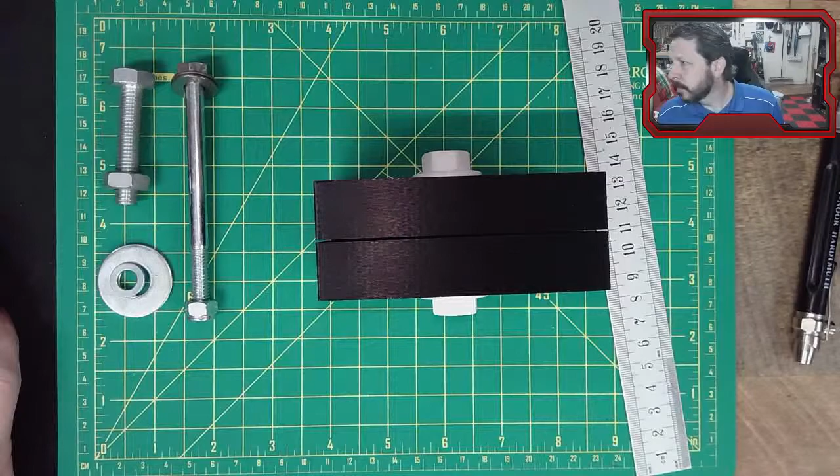Today we're going to move into the actual threaded fastener part of Chapter 8. Last time we did power and lead screws, which are threaded, but they're not necessarily used for fastening things together. They're in the same chapter, Chapter 8 of Shigley, at least the 10th edition. I assume it's pretty common for most editions. But today we're going to look at the beginning of threaded fasteners.

So the point here is that we have something with some threads on it, and we are trying to clamp at least two things together. That's basically the goal here. Now there are a lot of paraphernalia that go with them. There's all kinds of types of them. Let's see if I can pick them all up.

Some of them are named by their head type, what kind of head's on there. Some of them are named by their size. Some of them are named by their thread type. And it's good to have a general idea of all these different things, because some people can name the same thing.

Like this one, for instance. Somebody might call it a cap head screw, because it's got this little cap on it. Some people might call it an Allen head screw because the indentions in here are a Allen. Allens are also called hex keys sometimes, although you wouldn't really call this a hex head because a hex head tends to have a hexagonal shape on the outside of it. Some people might call this a socket head cap screw.

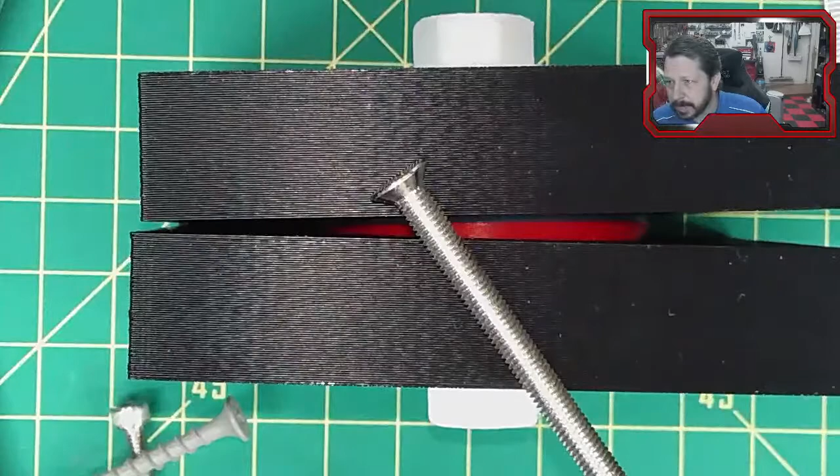Let's see if I've got any other types out here. I have other types of heads, so that's another thing. This one might be what someone might call a flat head because of the head being flat across here compared to something that's rounded. This one's a little bit ambiguous because it has a little bit of a shoulder right here, which some people might make into a pan head, and it's also very rounded, which some people might call round, although I would call this one a pan head. So it's got a little shoulder and a rounded top, and I would call this one rounded.

Oh wait, that's under me. Here, let's put it over here. This one, so rounded and pan head. And then this one being flat. Some people would call this one countersunk because it's got this little taper under it so that when you drill it in, if you've countersunk the hole, it can fit flush with the surface. I don't have an example of a countersunk hole, but it basically matches that shape.

But what I was going to make the point of, this is usually not called flathead because I don't know if I brought a flat one. No, I don't have one that I'm talking about with flat head. But it's slotted. Instead of this, let's see if we can get it to not shine so much. This little cross in here, a lot of times people call that Phillips head. And then one that just has a slot across it is either slotted, or some people might call that a flat head, talking about the kind of screwdriver you're going to use. So one that's got a flat head on it, or one that has this cross like a Phillips, is the other name for that.

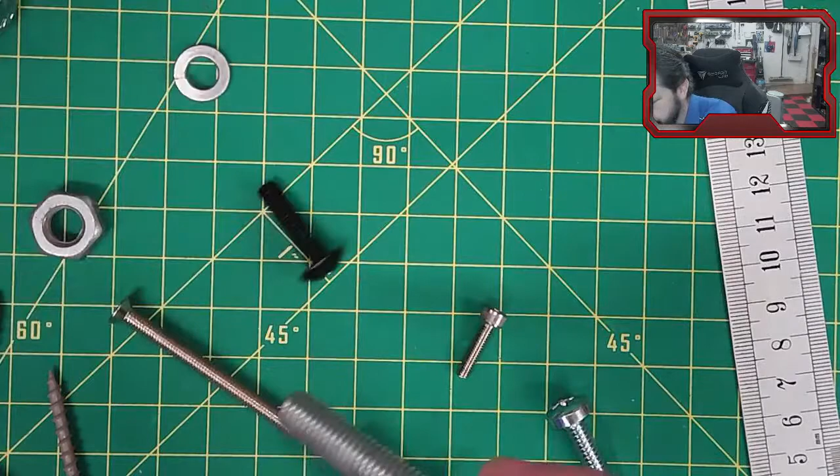So you have screws, machine screws, and bolts. Those are the big categories, and we're mainly going to talk about bolts. So let's look at those. I just want you to know there are all sorts of terminology to be aware of for naming things, naming parts of the bolts and screws. So there's a lot of stuff to make yourself familiar with when you want to talk about fasteners.

Let's get most of these out of the way. We can leave this guy, let's leave that, and let's get rid of all these for now anyway.

So the bolt, and a lot of times you have bolts and washers. I just didn't go find washers that fit this particular bolt right away. Let's screw this on so you can tell which is which.

So you have the head, usually a hex when we're talking about bolts, meaning there are 6 sides to it. There might be an indicator, so this says 4.8. Depending on where this one was made, this one has indicators that are little lines on it. There will be some way, if it was made in the United States, and you're in the United States, it's going to have some kind of indicator of the strength of the material.

We have a chart in your book, 2 charts actually, that describe how to read these. Let's see if I can find one real quick. Might have already passed it up. I'm looking for it. Here it is, or here's one of them.

So you have charts like this. This one had the 3 lines across it and then a manufacturer's mark, I think. So it would match this, which is a SAE grade 5, so kind of middle of the road in strength. The grade 1, actually grade 1, 2, and 4, you can't really tell the difference from the head because they don't have marks on them there.

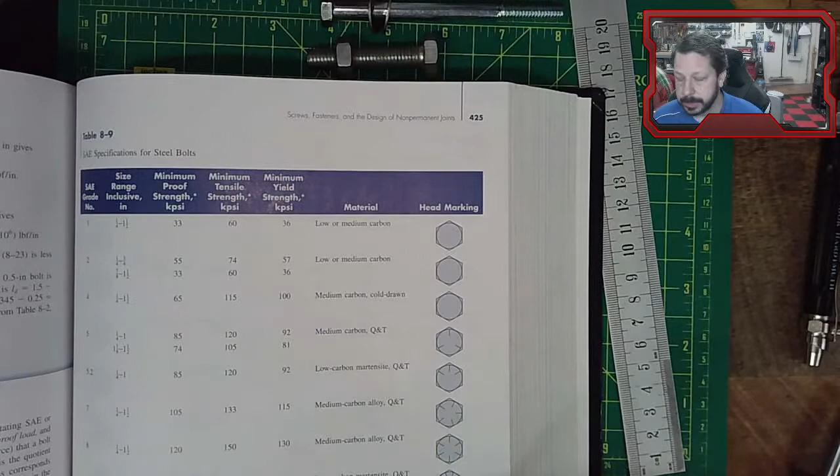But as you get higher grades, you are assuming you've chosen this higher grade because you need higher strength. Look at these minimum tensile. Well, let's look at the proof strength, minimum proof strength. Maybe tensile, because you don't know what proof strength is necessarily yet. So you know what tensile strength is. And look, they get gradually higher as you get more and more marks on these things.

And they get obviously more expensive too. So the grade is probably important in machine design because you're expecting a certain tensile strength, which is related to the proof strength.

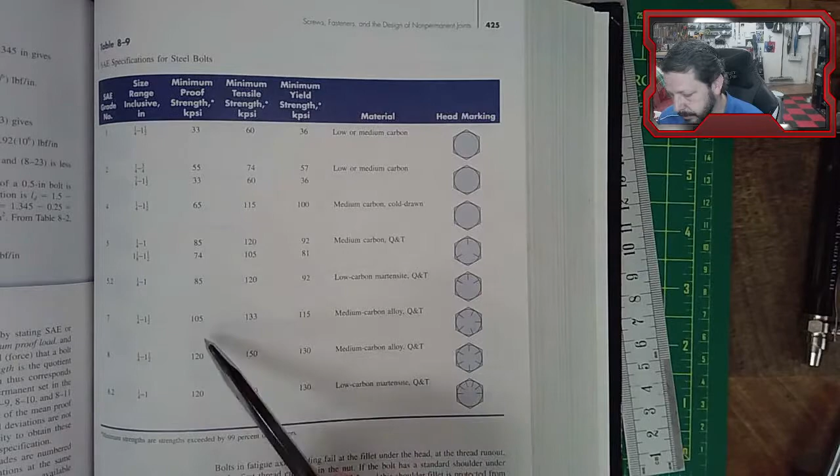The other one I had an actual number on it, 4.8. Let's turn it the right way, 4.8. And that's just a metric mechanical property. So 4.8 is generally used on M1.6, so pretty small, to M16. This is an M10 probably. Yeah, I would say that's an M10.

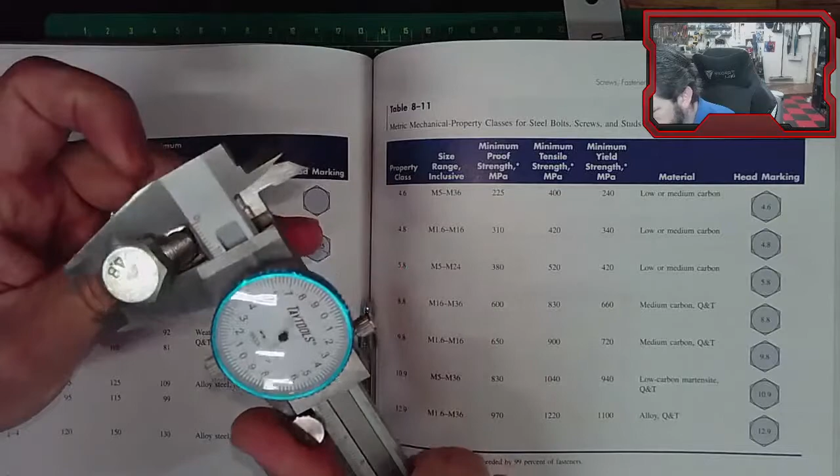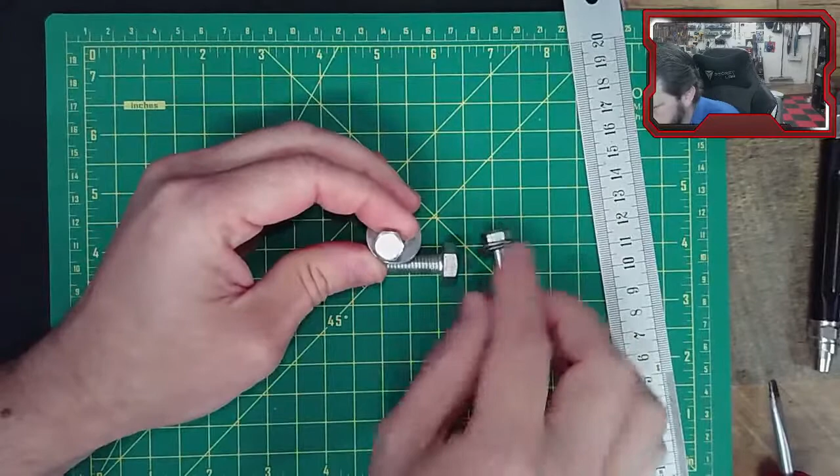Which is in that range, and then it has a certain set of strength characteristics. Same thing with it, that as the grade numbers get larger, the strength gets higher. And then there's other sets over here, ASTM type of sets, that you can tell. Again, not every bolt is going to have a mark on it. Here's one that doesn't have a mark on it, so either this one wasn't made in the United States for sale in the United States, or it's one of the really, really weak ones.

So you don't really necessarily know when they're not marked. In that kind of situation, you're either saying that bolt is not going to be carrying that much force, or it's not that important, or whatever. We just need something to hold these parts together. Whereas the ones that have certain marks on them, you're aiming for, you need at least that much strength. So you can always use a stronger bolt if you end up needing to, but you wouldn't want a weaker bolt. So you have these marks on them.

We have these thread profiles, like we talked about a little bit, and I didn't talk too much about them, but there are, in your book at least, we're going to go with 2 basic thread profiles, the UNC and UNF. So UNC is unified coarse, UNF is unified fine, and both of those are going to be listed out with some details about them which we'll need, not today, well actually maybe today.

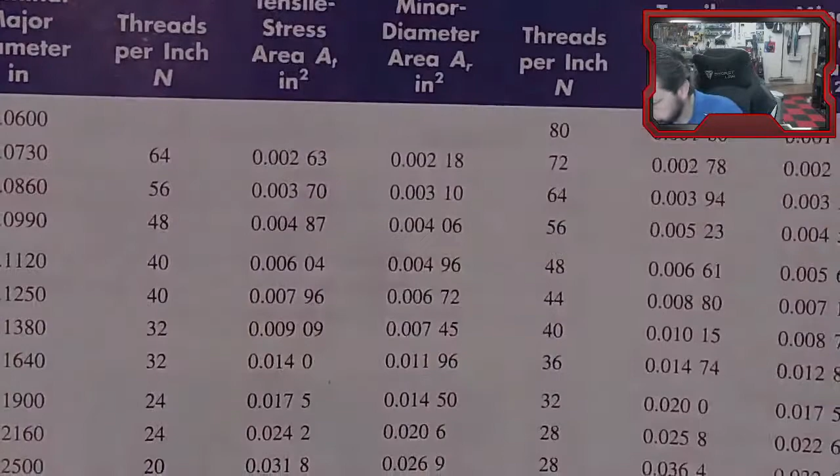They're going to be listed out in this chart, table 8.2, which we're really zoomed in on. And table 8.2 is just for US measured ones, so this isn't a metric table. There is a metric table on the previous page, table 8.1 though, that has some information also, and it just doesn't on the other table.

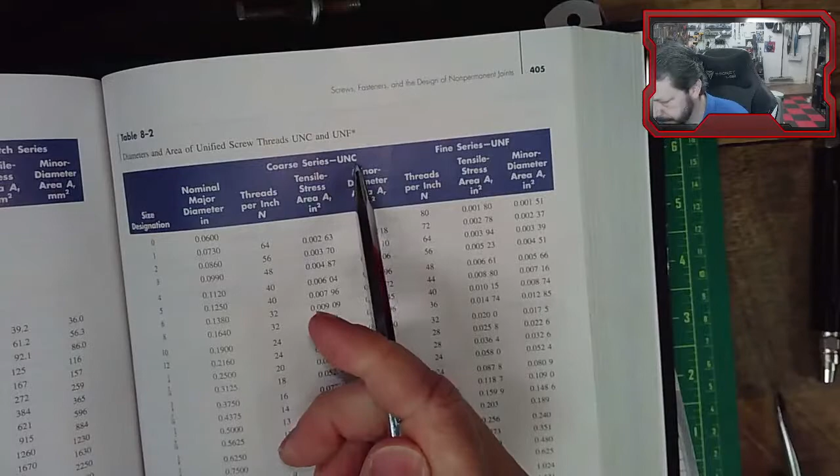It just says coarse and fine. This table says UNC for unified coarse, UNF for unified fine, and again that coarse and fine is threads per inch. How many threads are there per inch? Obviously, in the metric, you don't measure threads per inch.

So you've got information here about these diameters, the tensile stress area. This tensile stress area is when the bolt breaks in the thread somewhere, which isn't necessarily one of the more common places it's going to break. But if it breaks here, that would be that area in tension. It's similar to the root diameter, the area at the root diameter, but it's actually determined through testing.

So we need that just to figure out what area is carrying this tension. Bolts are going to be in tension when, we've got two pieces that we want to bolt together, and as you turn the nut - normally you turn the nut, not the bolt head - you're stretching out that bolt to a certain point. Depending on the type of connection you're trying to make, that determines how much you turn this nut.

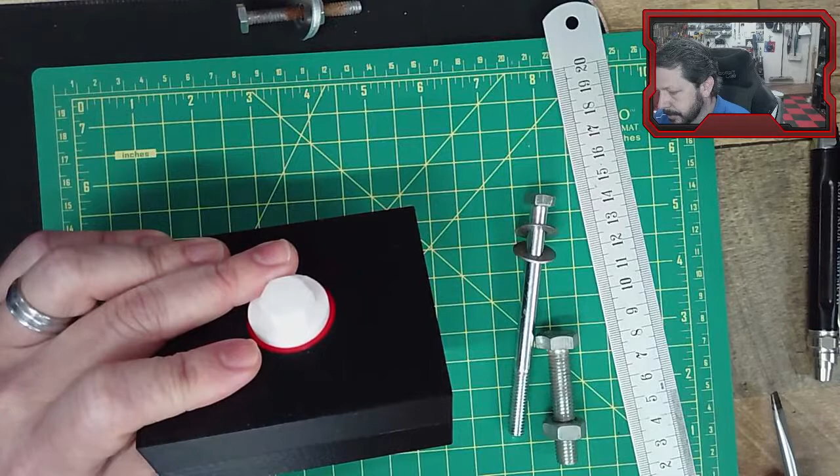The second most accurate way - well, there are some other in-between ways, like bolts that have little indicators in the head that change color when they've reached a certain tension. Those aren't very common, but maybe you can't get to both sides to measure, and you can only see the head, so there are some indicators like that. We're not really going to talk about those beyond what I just said.

The second most accurate way is you tighten the nut down until it is snug, and then you turn the nut a certain number of revolutions. You might see it as half turn past snug, or quarter turn past snug, or however many revolutions or parts of revolutions you need to induce that clamping stress, called preload, in the bolt. That's the second best way to do it.

The third best way is actually using a torque wrench. Torque wrenches can notoriously be cheated - you can jerk on them and they'll click, or the indicator will reach the number you're aiming for, and you didn't actually apply that kind of torque. They're also subject to this: you're not only measuring the torque applied to stretch the bolt, but torque being used up in friction in the washer or beneath the nut. A lot of times you don't necessarily have washers beneath nuts, I just put one here. So there's friction included, even if you're carefully turning it.

So torque wrenches are probably the third option, and the last option is just tighten it until you can't tighten it anymore. It might sound like the torque wrench is the best one because you have an indicator showing how much torque you're applying, but in very precise situations that's actually not the best option if the others are available - you can't always measure the change in length. The turn of the nut is usually a pretty good one, because no matter how much friction is involved, you're still turning the nut a certain amount, and that amount combined with your knowledge of the pitch of the screw tells you how much you've stretched the bolt out. So it's very deterministic that way - there's not a lot else going on. There are tiny things we'll talk about, but not that much.

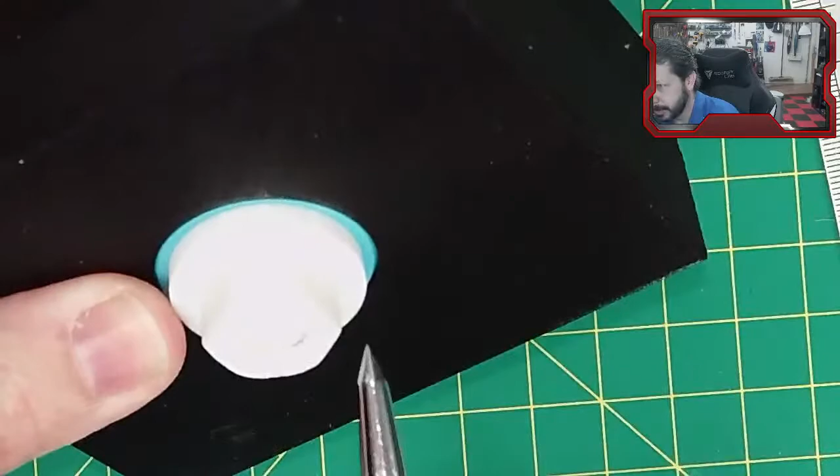Now this one, I've got some much larger washers on it, so some oversized washers. It's kind of blowing out with the camera. That's a little better, I guess. So this is an oversized washer just for something we're going to do later. But there's a little fillet underneath here. Let's go back in. Little fillet - you can kind of see a little fillet in there a little bit.

And so that fillet is one of the more common failure points. Because it is a fillet, there is a transition. And if you don't have a washer, that makes it worse, because the fillet can get caught on the edge of the hole. If you turn the washer upside down, now you've got this sharp edge of the washer on the fillet here, so that's even worse. So you really do want the washers in their correct orientation.

Another common failure point would be wherever the threads start. Now on this bolt, the threads start or end, whichever way you want to think about it. It was threaded from this end forward, so this might be the thread end, I guess is what you actually would think of. That coincides with the fillet, so that's a double whammy on this one. This one, since it has an unthreaded region, has threads that end right in here. You can probably see the lead out right there.

And so this is a common point of failure. This is a common point of failure. And then whenever you finish clamping, that first nut or the first thread in the nut is also a common point of failure. We talked about last time with the lead screws how there was 38% of the load carried in the first thread, 25% in the next thread. I don't remember what the third thread is, but it was smaller.

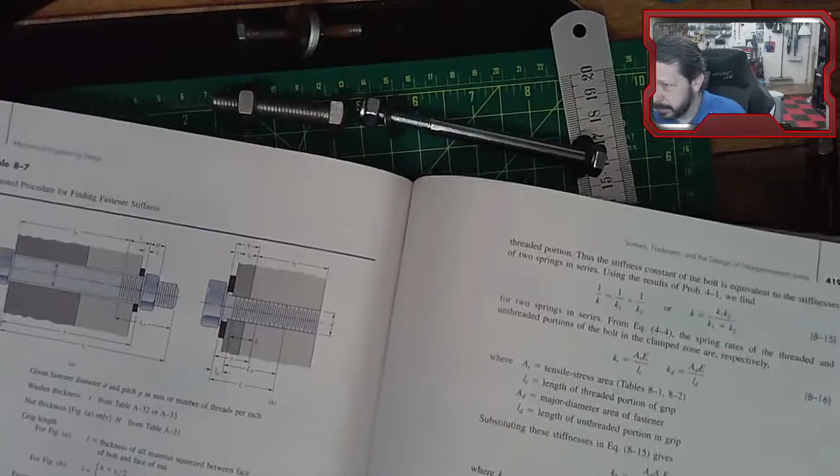You have a page that's really useful in your book, once I find it. Oh, like I was talking about the different head shapes and everything, your book does go through and describe them and give you some others over here, but that's not what I'm looking for right now. I'm looking for this page, so we might have to zoom out. We are zoomed out, it's just a lot of stuff on this page, 418, or table 8-7. I assume in most editions of the book the table number is probably the same, the page number might be slightly different.

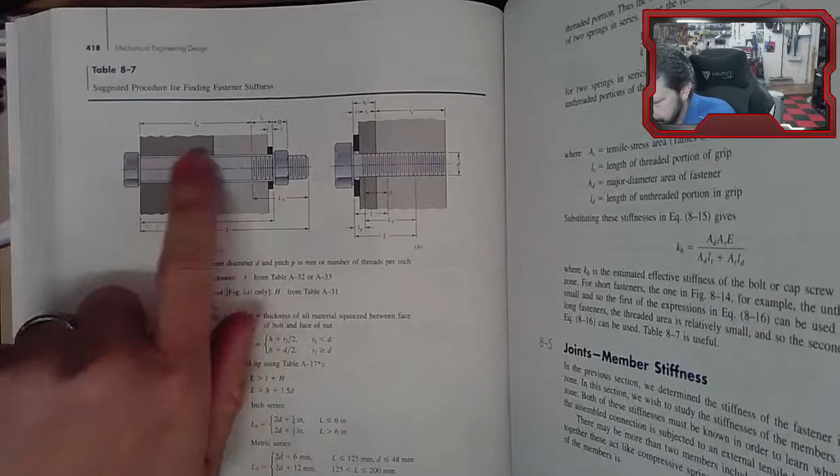What this page does is give you two scenarios for fastening at least two pieces together. It can be more than two things bolted together, you can have 3 or 4 things, but in general there's 2 things bolted together. It shows one situation where you have a bolt and nut, and the bolt goes all the way through, you screw the nut on the other end. This one actually has a washer on the nut side, and they're just using the washer face of the bolt on this side. This one is hard to read.

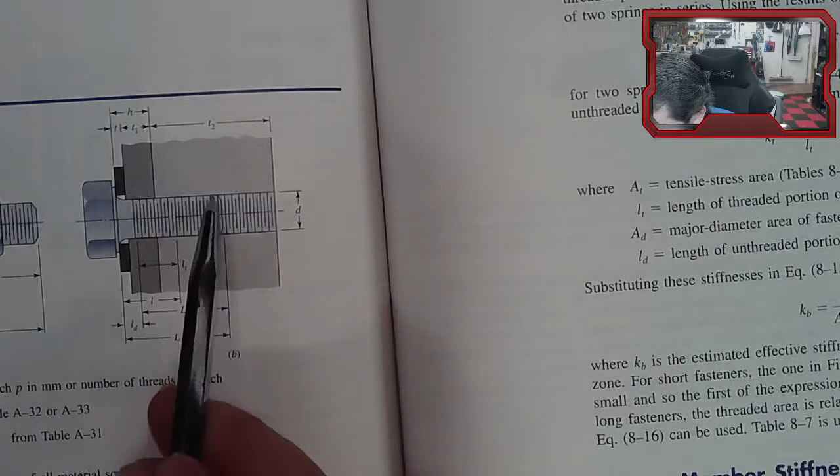You have to look at it really closely. Let's see if I can find my pointer. Maybe we can even zoom in, because it is, there we go, we can see now. This little piece right here, see how it doesn't look like all the others? Those little angles are showing the end of the bolt. I really wish they'd have colored this section different or something. Maybe I could even do that on mine.

This part is not the bolt, this is the hole. The hole goes in the dark gray, there's just a hole. In the light gray there is a threaded hole here, and the bolt goes through the dark gray. You don't want the threads in the part that's being clamped to the other part, because it needs to freely slide through this part, and it screws into this part. This one, you may or may not have access to the other side. This one looks like a through hole, but it could be a dead end, not a through hole. If possible, you want a through hole so stuff doesn't get packed down in there, but you don't always get that option.

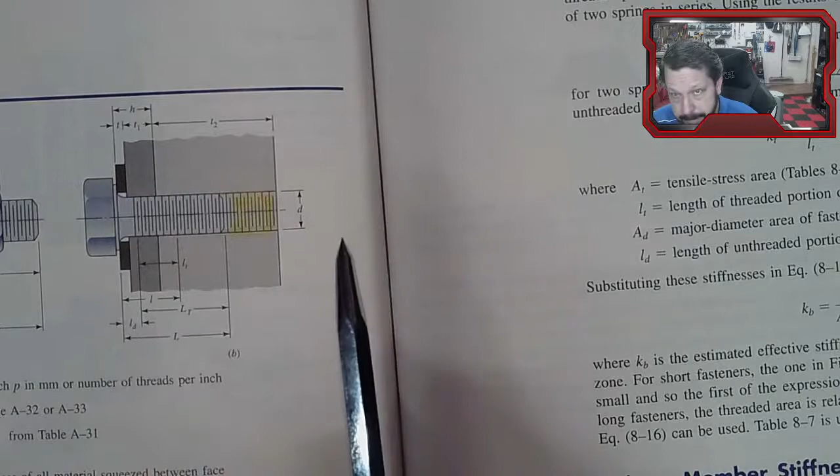So this one would be the case where the bolt doesn't have a nut. All the threads are in the bolting or clamped piece, one of the clamped pieces, the one on the other side of the bolt head. This one is just being squeezed to that one, so there's no threads in this one. It does have a washer here.

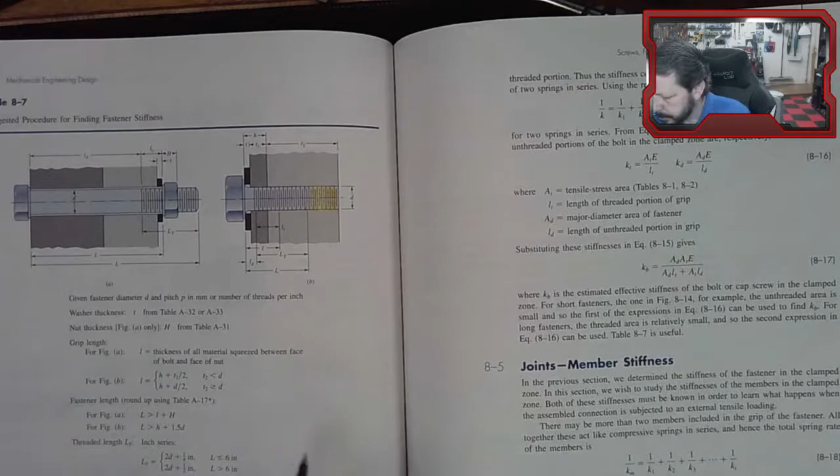All these little L's, LT, D, all these things are actually described further down this page. There's a lot of definitions down here, some on the next page, but these are all the lengths you might need when we're calculating what we're going to calculate. So today we're going to calculate stiffness of the bolt itself, the fastener, and stiffness of the pieces being bolted together.

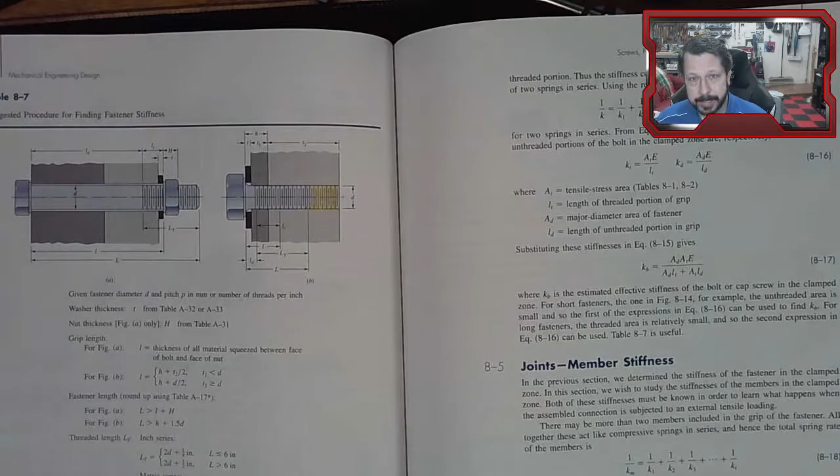And the combination of all of that. So what ends up happening, and it might be easier to think of with this one, is the more you tighten this nut, the more you stretch this. I'm stretching a piece of metal. It's a spring at that point, just a really stiff spring, because it's basically this solid piece here. This one, if I'm tightening this, I'm stretching this portion and this portion, which does not have threads. This one does have threads, so they have slightly different spring rates.

So I have to add those together. This one is just all threaded, so I wouldn't really have to do anything different with it. It's just one spring rate in there, unless you really want to get picky and say there's a tiny little section up here that's not threaded. I don't know that you want to be that picky though. Make it a little brighter.

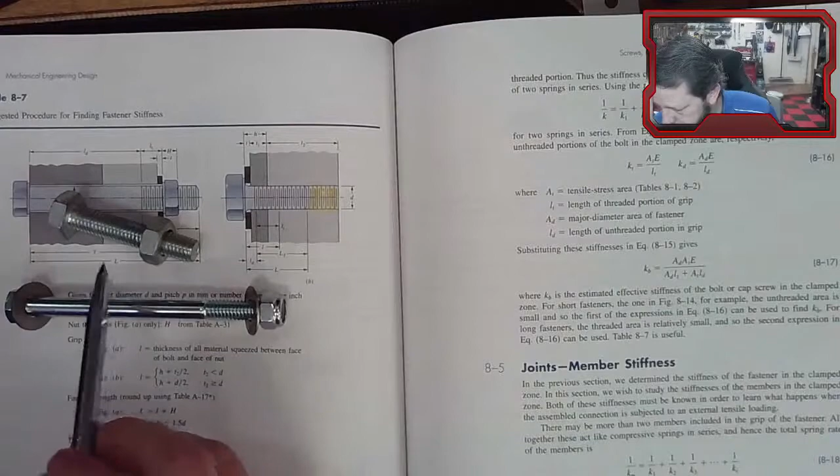All right, so this spring here, as we pull on it, it's not a very efficient spring I guess, but you do apply a tensile force and stretch this out so that it does have a spring rate. It's just, again, millions of pounds per inch spring rate. And at the same time, you're compressing the things you're clamping together.

Now this one, I want to show you why I've made this here, and actually this one we might need to make even brighter. So remember, we're stretching the bolt. It's a spring. We're compressing these clamped members, and they are also really stiff springs, even stiffer than the bolt is. But we're compressing them.

But the bolt only has so much influence. It can't, if I'm clamping here, then I'm not really compressing something that's over here, or even on the edge here. I'm not really compressing this part too much, other than the fact that I'm pulling the whole piece of metal together. So there's these zones of compression that really determine the spring rate, and that's what is inside here.

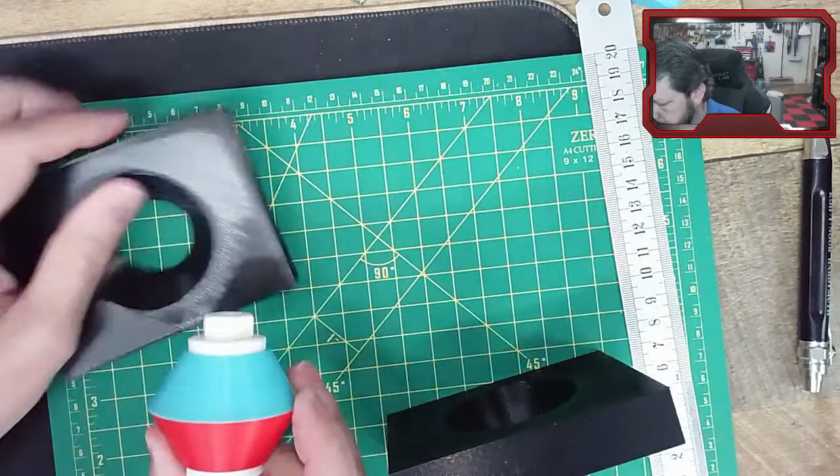So this shape here, this is two shapes actually, let's take it apart. Kind of screwed it together pretty tight. Oh, here's the nut over here.

So these shapes are called frustums, sort of like a cone with a hole through the middle, and we've chopped off the top. I have two of them that are, in this case, identical. They're often going to be identical, but it's not always quite as simple as that, because these could be different materials, they could be different thicknesses.

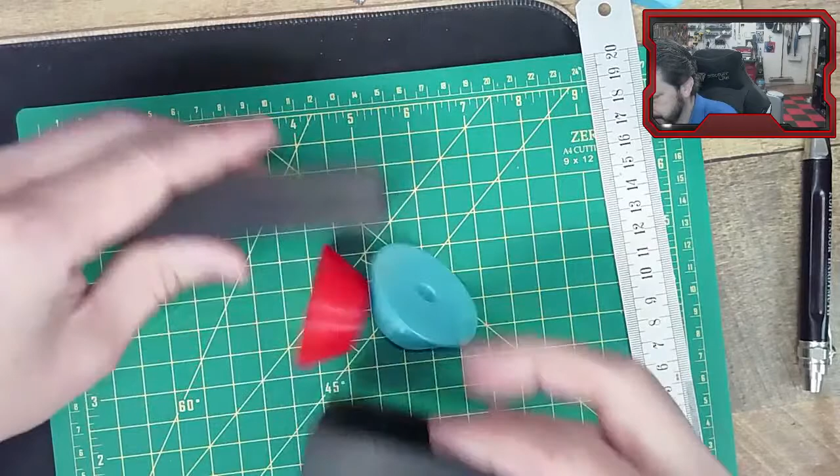No matter the material, thickness, all that kind of stuff, these end up being this shape where you go to half of the grip, whatever that is, and one half looks like this shape with a 30-degree slope, and the other half looks like a mirror image of that. It just might be that this point here, where they become mirror images of one another, may not coincide with the same point on the parts here. So in here, they become mirror images, like basically the red one goes in here, the blue one goes in here perfectly. But it could be that this is 3 or 4 times thicker than this one, and then you'll have...

If this is really thick, then these things, I should have made an example of that one. Maybe I'll have time to print one so we can show it tomorrow instead of just trying to describe it. Then the part where the mirror image drops down, this one is all red, this one would be blue, and it would have part of where the red starts to taper back in. There's kind of an image in your book that describes that.

Well, here it is. Notice how the bottom part is thicker than the top part - the clamped piece on bottom is thicker than the clamped piece on top. The two frustum - well, actually the plural is frusta - so two frusta still, and it almost fits right, but they are still half of the grip.

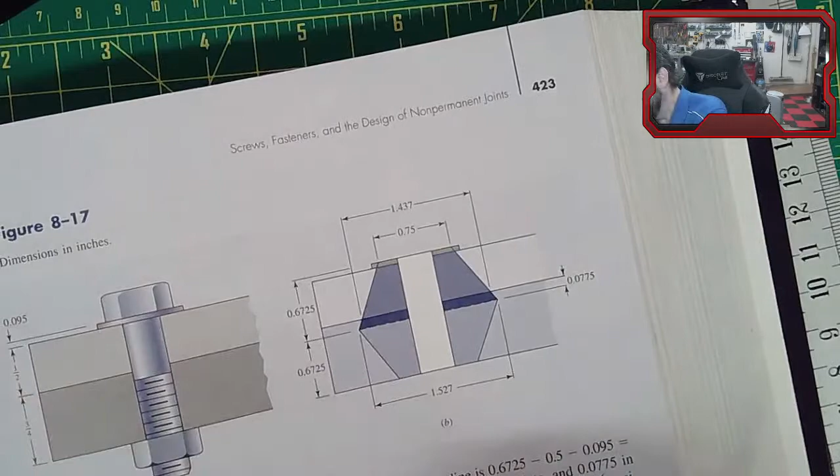So the grip in this case would be from here to the top of this washer. The washer is in the grip also, so they're half of that, but it turns out the top half crosses over this boundary, right? Because you literally take half of 3/4, 1/2 plus 0.095.

Half of that is where the mirror image happens, and that's why they've got this top frustum existing between the light gray, with a little sliver of it in the dark gray. We'll talk more about that when we actually solve one of these things, and maybe I can print one - actually I don't know how I'd print it, because we couldn't put it together. We'll have to figure it out.

Anyway, let's do the simpler stuff first, and then we'll work our way up to these things. So let's say we've got this - actually, let's rebuild our deal here.

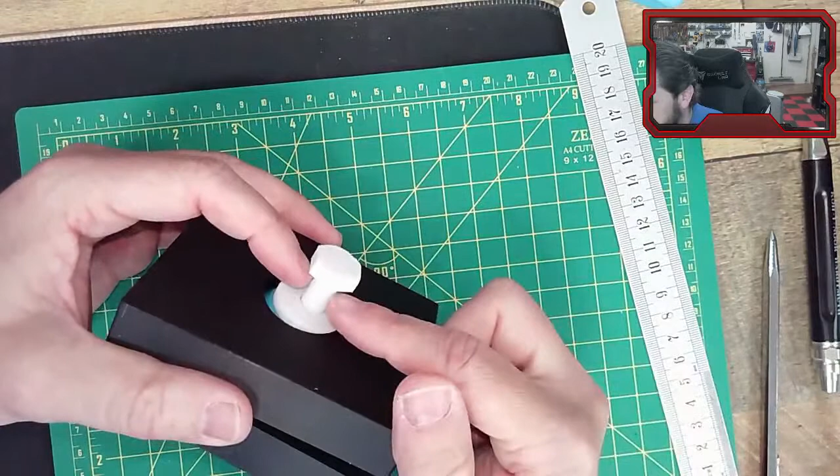So we've got a model of an M10 by 1.5. The 10 means it's a 10 millimeter diameter screw, so 10 millimeters across here. The 1.5 means there's 1.5 millimeters between consecutive screw threads. Remember we had double starts, triple starts, and quad starts on the lead screw - you don't really have that on bolts and nuts, they're pretty much all single start.

Then we have a washer, then we're going to have another washer just because that's the way I made this part, and then we will have our nut. There we go.

All right, now we're clamping this thing. In this one, you really should have about 2 threads sticking out, 2 or 3 threads of the bolt sticking out past the nut. So this bolt is technically a little bit short - it needs to be a couple of millimeters longer.

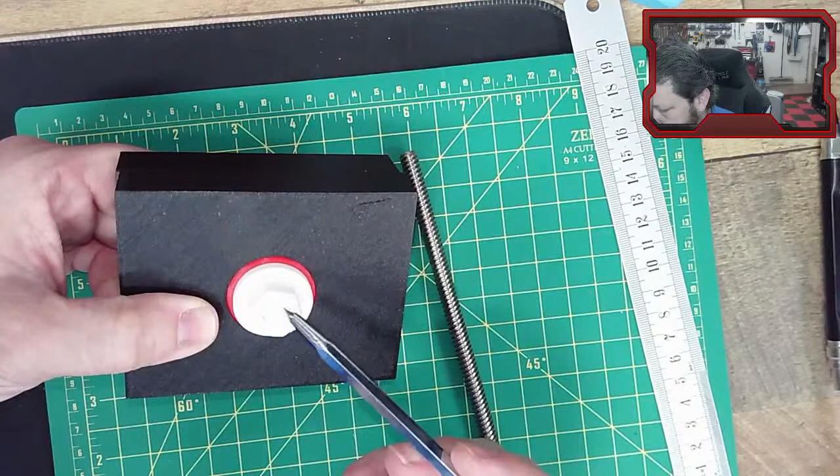Because you don't want a location where, first of all, you're not getting all your strength - there's a little bit of strength left. You got most of it by having the 3 threads engaged, but you did leave a little bit behind. Second, stuff can get packed in here, dirt and grease and all that, and cause problems later on.

Also, you don't want the bolt sticking out like an inch or anything, because then it's going to be a hazard for working around it, since you've got this thing sticking out of here. So about 2 or 3 threads sticking out.

When you are designing these, you measure the grip, you measure what kind of washers you're going to use, the nut, add all that together, and then you add a little bit more so it can stick past the nut. But you don't necessarily order that exact size of bolt unless it's super important that you do - what you actually do is pick a standard size.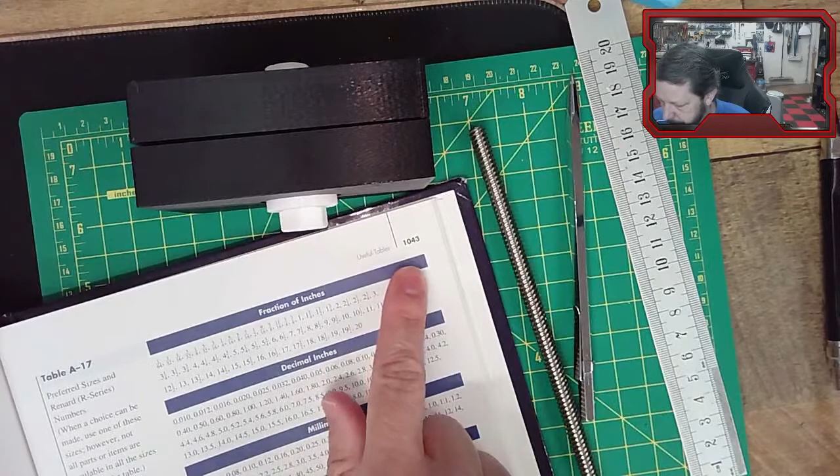So there's a little chart - it's in the back of your book, maybe page 1047. Let's see... no, not 1047, not that. 1043 - this table A17 on page 1043 gives you a list of standard lengths.

Now, this may or may not be the list of standard lengths that your particular supplier carries. So all these tables we're looking at here, you don't necessarily go back to the book and look up numbers from it - these are sort of generalized. In some cases they're from manufacturers, but are those the current standards? The book is some number of years old, so it's not a good idea to use the numbers in the charts when it's a manufactured thing.

Using things like stress concentrations out of the book is kind of expected, but when it's a manufactured thing, you really need to go to your supplier and look at those same type of numbers from that supplier. So this is just kind of giving you the idea of what you would find at a supplier.

They have certain lengths of bolts or fractions of sizes, typical fractions. This was a 55 millimeter bolt, I think, and it's a little bit short, so I'm assuming 60 would be the next one up. Let's see, 50... they don't even show 55 in this chart.

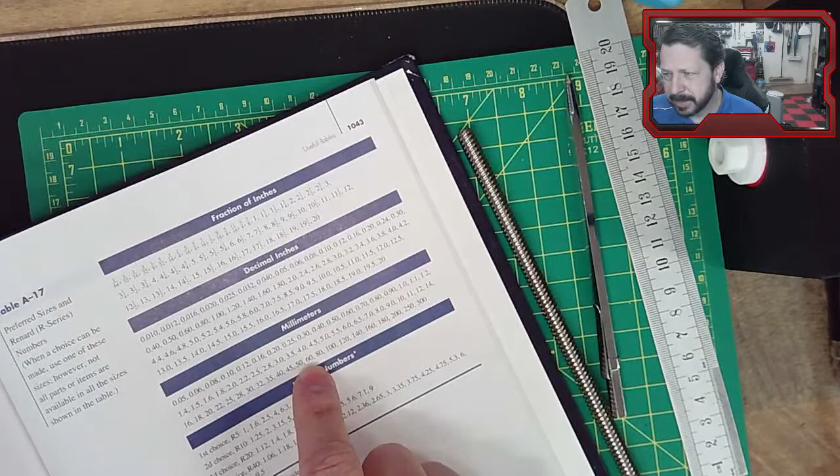This is a model from McMaster that I printed. So there was a 55 there, but 60 is the next size up in this chart. When we're doing coursework, we'll refer to this chart for standard lengths, but in the real world you may have fewer or more options. What you don't want is to specify a 53.48 millimeter length bolt—unless it's super important that it's exactly that length, that's probably not the best route when you're the designer.

That's on page 1043, table A17, our standard sizes of stuff. So we bolted this together.

Where are we at on time? We got time for some stuff here. If I don't finish all of this, I'll do like last time and add a walkthrough of just the calculations. If you didn't see that, I did it for a lead screw—I used the Ender 3 printer's lead screw and went through calculations of how fast we can move the z-axis based on that lead screw. We also calculated the stress on it just to do it, although there's almost no stress on it. So I'll do that same kind of thing if we don't get through all of this, or if it needs to be redone for some reason.

All right, let's start with the bolt. This particular bolt did not have an unthreaded region—it was all threads. I'm going to bring up MathCAD so we can look at things a bit neater when writing them out, and we'll switch back and forth between MathCAD and the textbook page. So, we want to do the bolt stiffness.

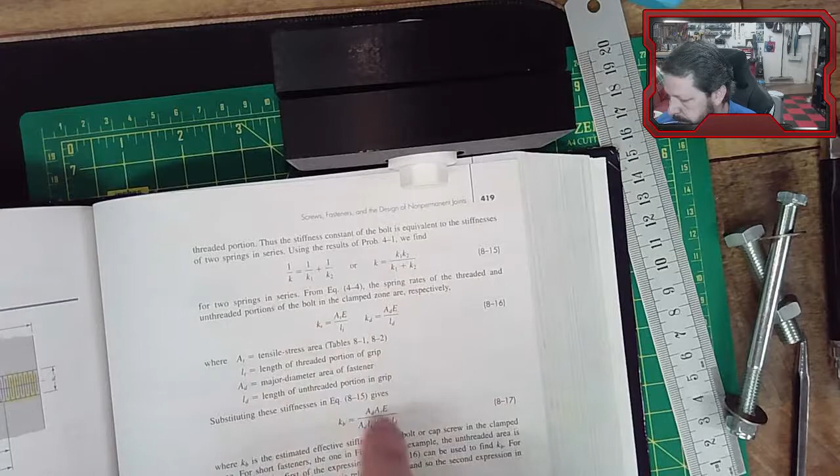This is on page 419, which is where they derive the bolt stiffness. Let's look at that real quick. Here, K is the spring rate, and this derivation is for a bolt that has an unthreaded region and a threaded region. We can use it for one that's completely threaded too—anywhere the unthreaded region would be, we just zero that out.

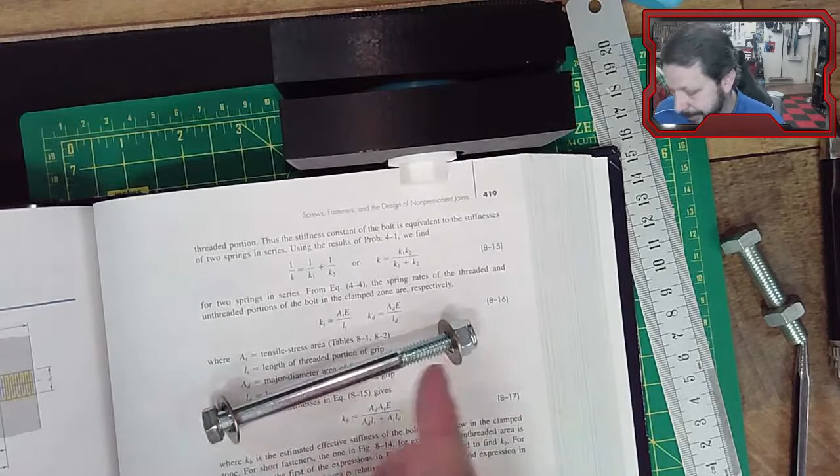What this kind of bolt does for us is act as one spring in series with another spring, and that's what they're showing here. Springs add in series with the reciprocals, so they've rearranged it here. These springs should probably have the same modulus of elasticity from one end of the bolt to the other—that would be a really strange screw if it did not. So they're calculating the spring rate of the threaded part and the spring rate of the unthreaded part, using T for threaded and D for diameter for unthreaded. So threaded on this side and unthreaded on this side.

So AT, that's the tensile area of the thread—that's one of the numbers you have to look up in table 8.1, back several pages. It's actually in the section with the lead screws, which always confuses me why it's there, but that's where they put it.

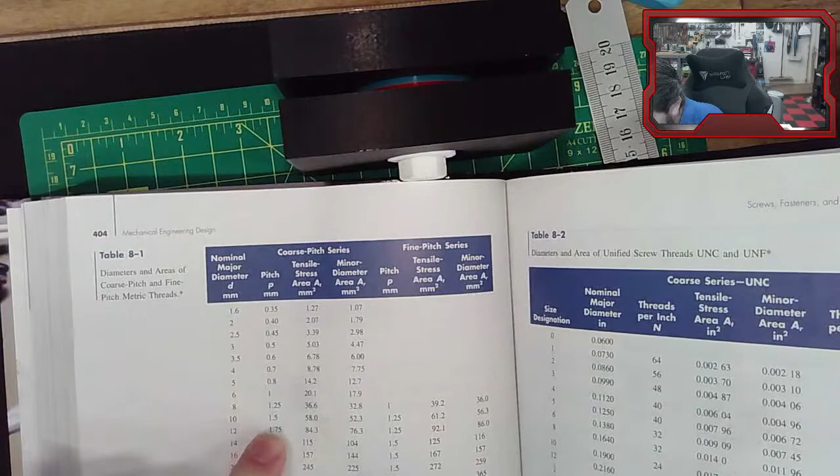For ours, we have an M10 with a 1.5 millimeter pitch, meaning there's 1.5 millimeters between consecutive threads. And we have a tensile stress area, AT, of 58 millimeters squared. So let's write 58 millimeters squared for AT in our MathCAD... Oh, yeah, there were—AT, 50 millimeters squared. I don't know if it's going to give us the AR minor diameter, but normally the other area we need is AD.

Normally you just take the 10 millimeters and calculate the area, so we'll do that. AD is going to equal pi D squared over 4, and we can put D in a second, which it doesn't currently know. Let's move these down a little bit—so this is a 10 millimeter bolt.

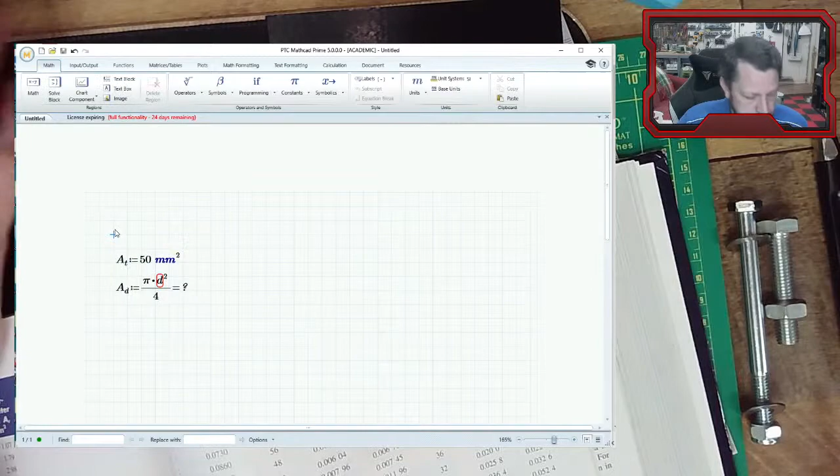So there we go. I don't want it in meters squared though. There we go, and that makes sense. It's a little larger than the threaded region. So that makes sense.

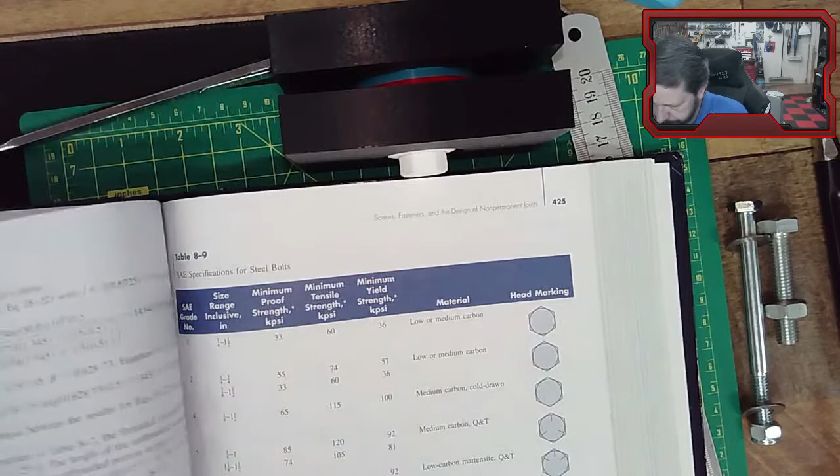Then, other parts of the equation, we're going to need the modulus of elasticity of this material, E, and E is going to be dependent on what material we're using. Let's just see if we can find a good value for that. Obviously this is plastic, so that's not going to work, although there are plastic and nylon fasteners. I thought your book had a chart that shows you the strength. We'll have to get modulus of elasticity out of the back of the book.

Let's just grab it from this one. This is a grade 5, and it has 30 million PSI. Now we're in the metric system, but MathCAD doesn't care about that. MathCAD just wants as long as we put the units on there, it can handle that for us. So let's just say that's a steel bolt, and I think that's 200 gigapascal. Let's just put it in 30 million. All right, so MathCAD will handle our conversion for you. In fact, we can do it this way. Yeah, it was 200 gigapascals. All right, so good enough.

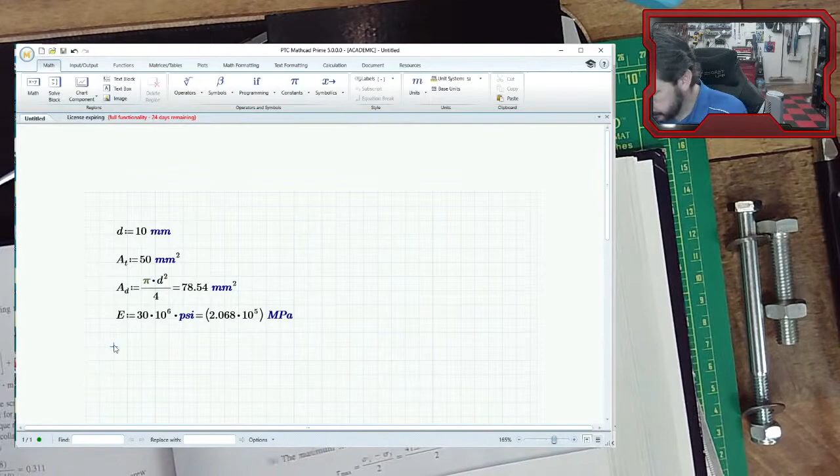Let's see, we need the length of the thread. So this one you have to be a little bit careful on. Pretty much if you have one that is unthreaded, you definitely need the unthreaded region to exist totally in the grip, right? If we've tried to bolt these two pieces together with this bolt, put the washer down there, we couldn't do it because the threads end way back here. So we couldn't run the nut up far enough to actually clamp it. So the threaded region exists in the grip.

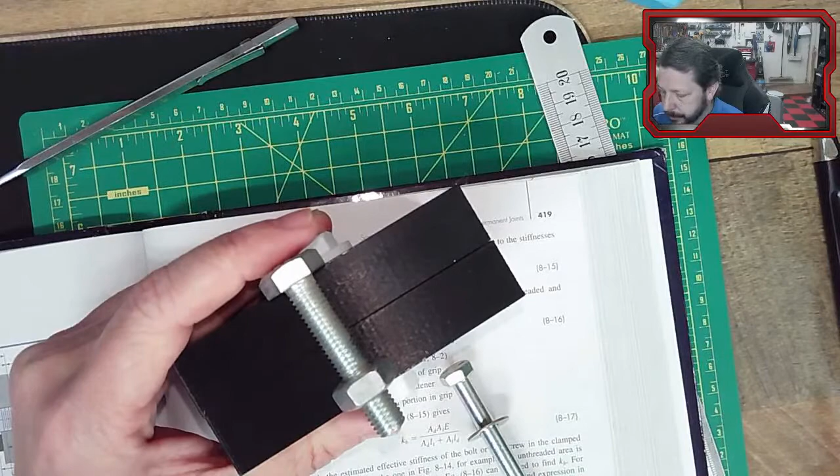Now, also on top of that, in general, you want the unthreaded region to go across this gap right here, where the two pieces are clamped together. You want that to be unthreaded instead of having the threads go through there. Now, in this case, the threads have to go through the gap here, there's no option for that.

Why you might want to avoid doing that is if this has not only forces trying to pull it apart, but forces trying to shear it, it's better to have that shear force on the unthreaded part than having it carried on the threaded part. The threaded part is a little smaller, and it has these really high stress concentrations from the screw threads. So if possible, if you think this is going to have shear on this join, then you want the unthreaded part to be across that shear plane. In this case, that's not an option because our bolt is threaded the entire length.

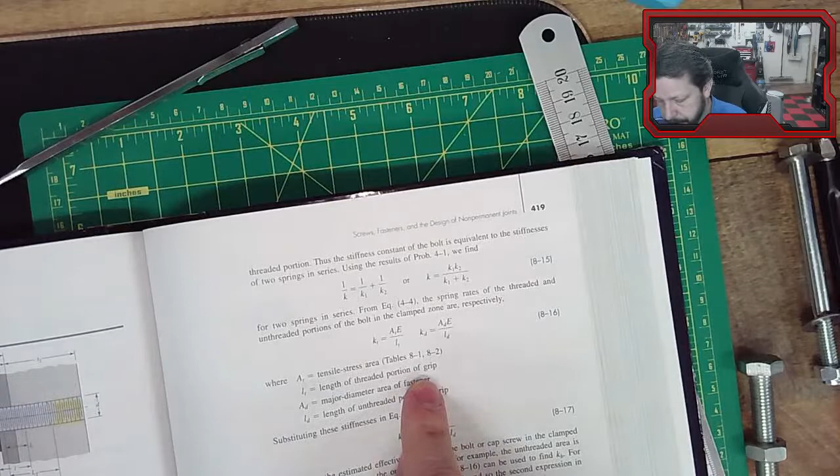So to get the length of the threaded part, we're just going to measure the length of the threaded part of the grip. So the grip, again, is going to go all the way from the top of this washer, under the head of the bolt, to the washer bottom on this one. And top and bottom is kind of relative to whichever direction you're looking at it. So we need to measure, and I don't think my calipers can reach across there, so we'll do it a piece at a time.

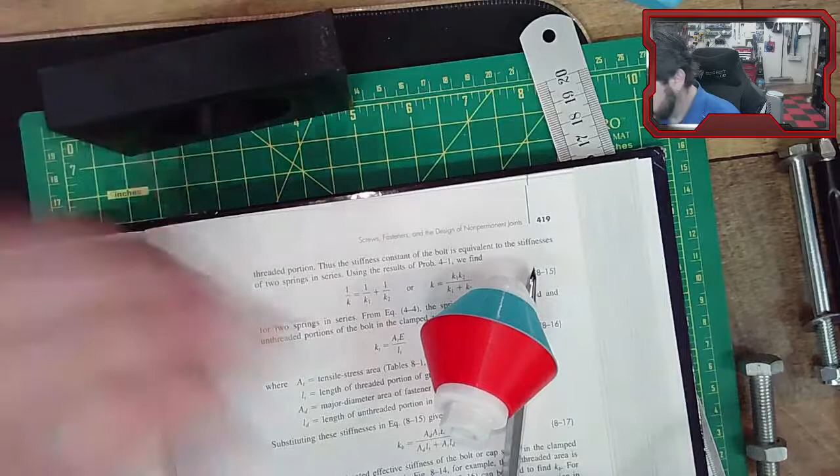So we need to measure this, well, it's 20 millimeters. We need to measure the thickness of our washer, it's 5 millimeters. So I've got... let's draw it out so you don't have to try and remember it all.

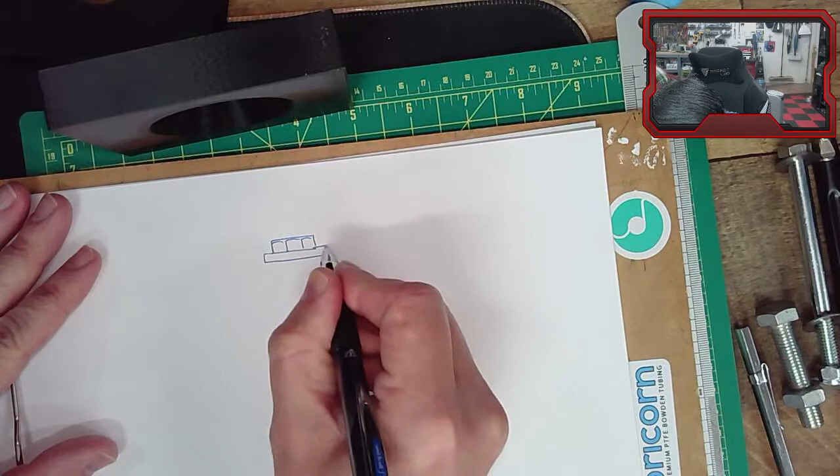All right, so we've got the head of the nut, we've got the washer, we've got clamped piece number 1, we've got clamped piece number 2, we've got washer, and we've got the... I think I said nut there, that's the head of the bolt, this is the head of the nut. And then hopefully we would have a couple of threads sticking out, and the bolt goes through here.

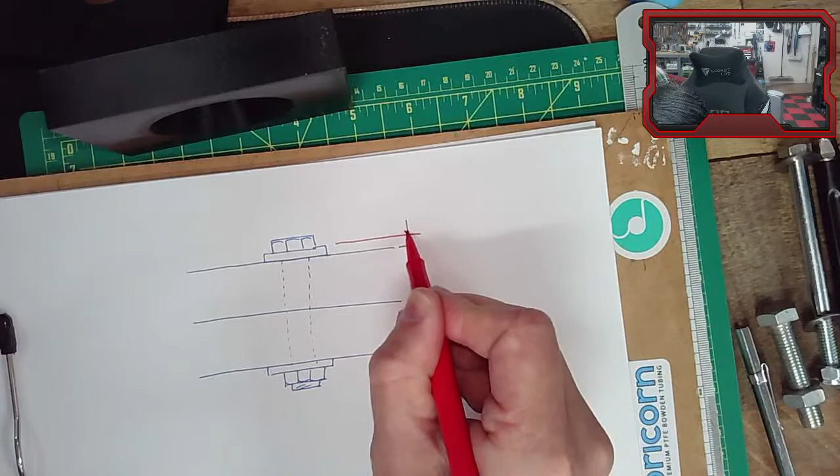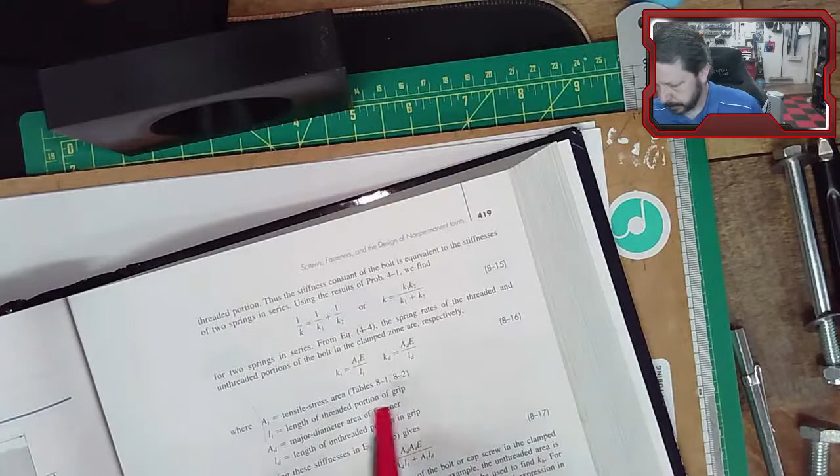All right, so the grip is going to be, we measured this as 5 millimeters, we measured this one as 20 millimeters. We didn't measure the other one, but it's also 20, I printed the exact same thing twice. And then this is also the same 5 millimeters. So we have 50 millimeters of grip, and that's the LT in this equation here, the length of the thread in the grip. So you don't actually go measure the bolt because some of the threads are likely to be not in the grip. So LT for us is 50 millimeters.

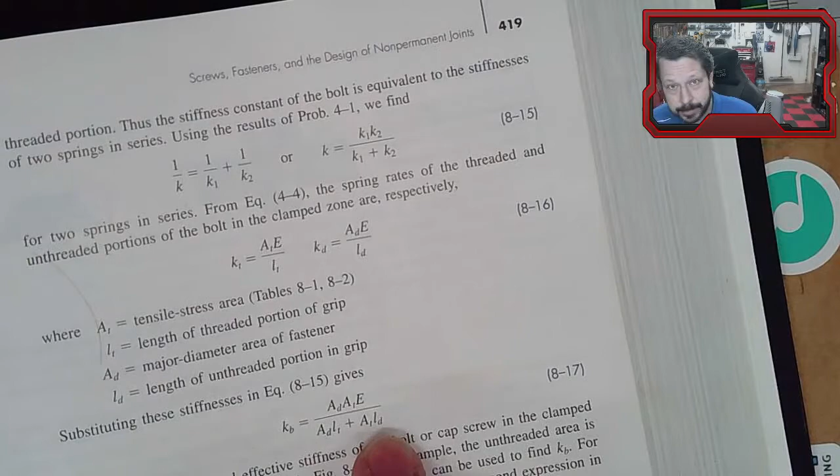Okay, we have E. Now here's the actual equation where they've combined the threaded and unthreaded portions, KB, the stiffness of the bolt. We have all of these things. We didn't do LD, the length of the unthreaded portion in the grip. We'll do that, it's 0 for ours because it was fully threaded. They're both threaded and unthreaded have the same modulus of elasticity. We have our diameters, so I think we are good to go now.

All right, so let's go over here and build our equation, KB. So the stiffness in the bolt is equal to the area of the unthreaded portion times the area of the threaded portion times our modulus of elasticity of the bolt material, divided by area of the unthreaded, which is going to be 0 for us, times the length of the threaded portion, plus area of threaded times length of unthreaded.

And we have to put in here that our LD is 0 millimeters, and we might have to actually measure it to get, because it is like a millimeter or something. But here's what we have: kilograms per second squared, probably not the units that are going to make much sense to us.

Let's do newtons per meter. Oh, you know what? Why is it... it has megapascals. Why is it giving me these weird units? I don't want that in there. There, kilograms per second squared. I need another, I've got a unit messed up somewhere. I wonder if it's in the fact that I'm using PSI. It shouldn't matter because it converted it to megapascals.

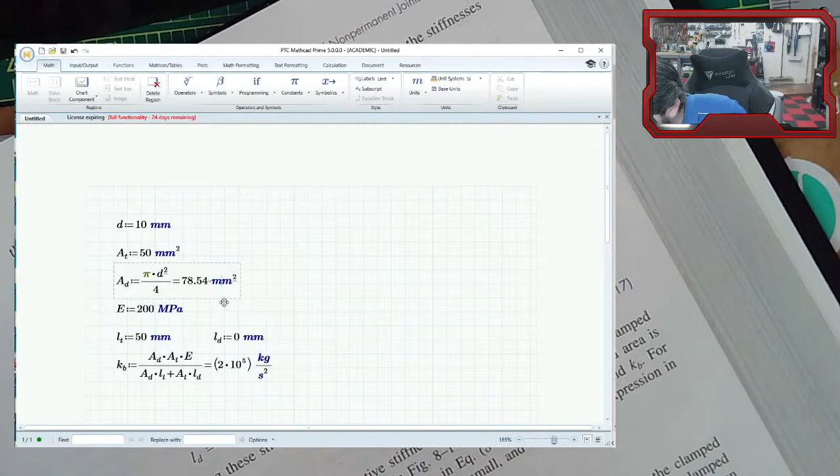Yeah, it didn't, that's not the problem. I'll have to look and see why MathCAD is angry with me. I'm pretty sure I wrote the equation correctly, but there's some weirdness with why it's not put in. It's giving me kilograms per second squared instead of a stiffness. I'll have to look and see.

Anyway, that would be how we would calculate bolt stiffness. So all this would be, once we get it right, the stiffness of the bolt itself. So the spring stiffness of the bolt.

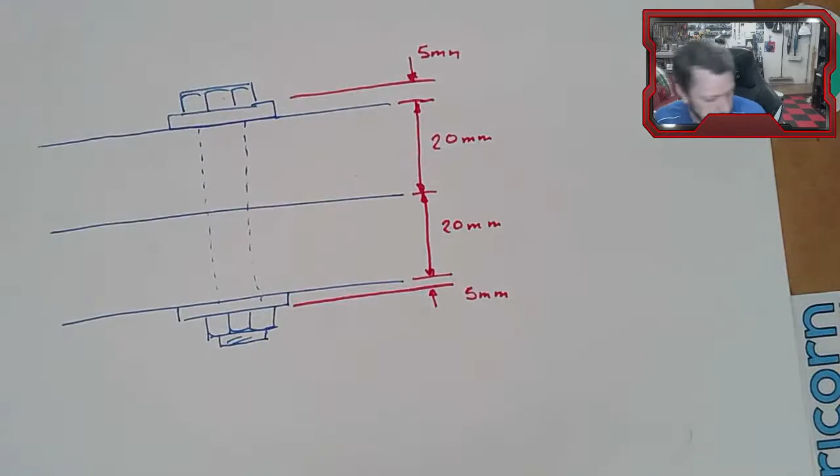So now, if we were to draw a picture of what this kind of looks like, let's use different colors. We have a spring, I guess this kind of looks like threads on it, but this is going to be its spring. So there's a spring here representing the bolt, and we just calculated stiffness, although I've got something kind of messed up in the calculation there that's giving me weird units, but that's okay. So I've got the spring of the bolt, and I'm turning this nut down here and stretching out the bolt, so it's in tension. So I'm actually stretching it out.

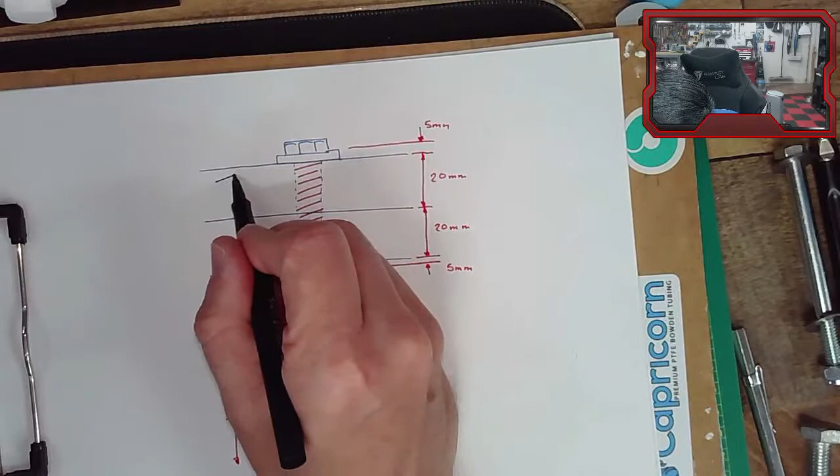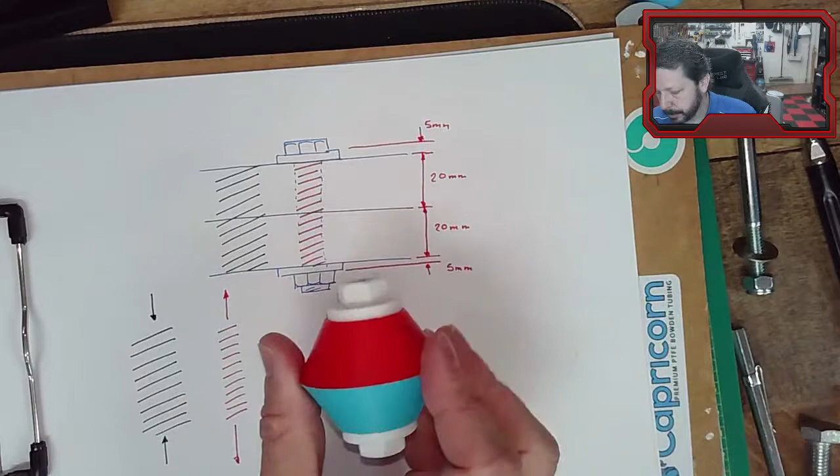Now we need to do the same thing for the clamped pieces, so for now let's just draw them as a big spring over here. So this big spring is actually being compressed. So I've got a preloaded stretch in the bolt and compression from the bolt being stretched transferred to the clamping. And remember, I'm dealing with this shape of region that is springy in the members, so in the plates here. It's not quite as straightforward as the nice cylinders that I had for the bolt. So the equations for calculating this spring rate are a little more complicated. Your book goes through several of them.

Oh, I bet it's because I have that 0 in there. Hold on just a little second, let me look at something. Nope, that didn't care, I'll have to see what's going on. All right, anyway, it's hard to try to figure things out while you're talking about them.

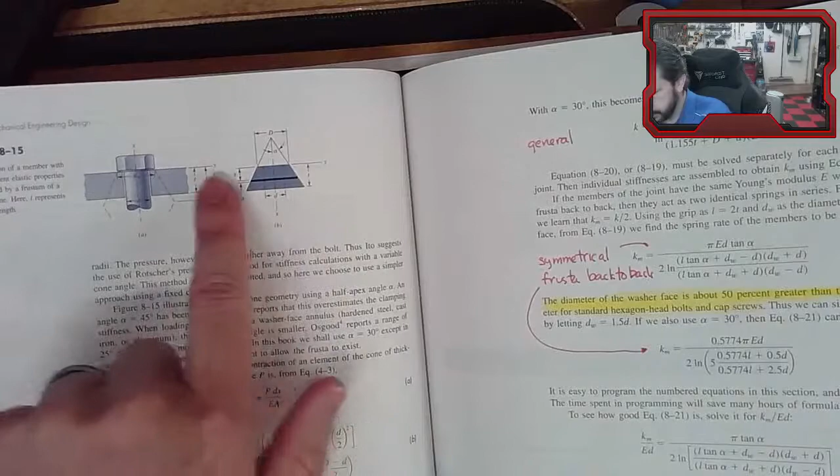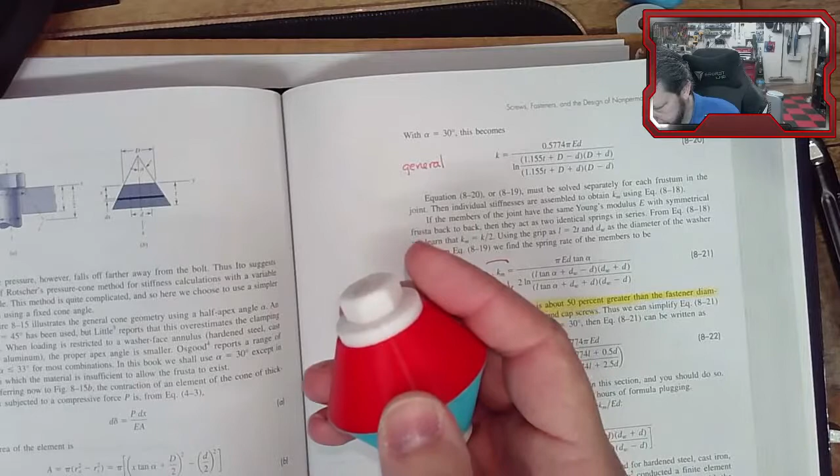All right, so, well actually over here, starting over here and using these diagrams, there's a little explanation about what shape to use for this. And they talk about this pressure cone, mentioning that it's really complicated to do it this way, the Rotscher's pressure cone method for stiffness calculations with a variable cone angle, which may be more accurate. But your book goes through and says they did some finite element analysis, Osgood did, and came up with a range of cone angles, so the angle here, alpha, and found that 25 to 33 was a good range for that cone angle.

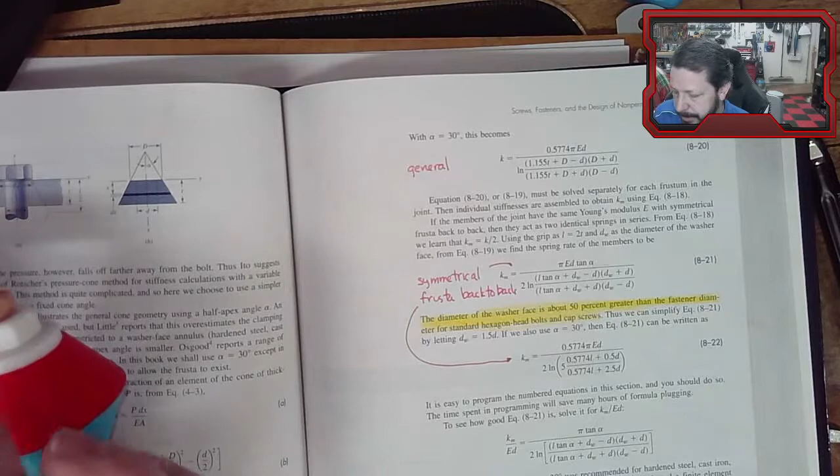In the book, they use alpha equals 30 degrees, except in cases where the material is insufficient to allow the frusta to exist. So if you had something like a sleeve you were bolting together, the cone would go outside the sleeve. There are plenty of linkages, even in an automobile, where you have a sleeve connected to a rod that you're clamping on. That frustum can't develop because it would actually be outside the sleeve. So in cases like that, don't do this process, is what they're saying.

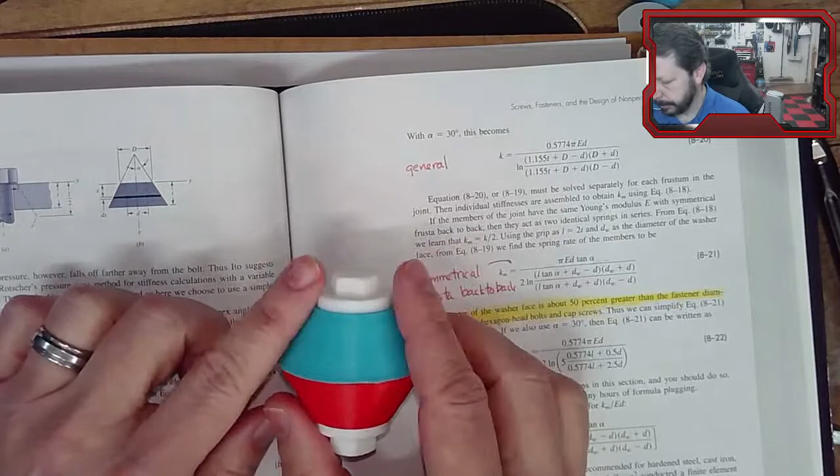But in cases like this, where the frusta, both of them, will fit within the shape of whatever's being clamped, then this method works. And not only that, but you're going to use a 30-degree alpha. So the slope of this line, or this line, is 30 degrees.

And then they go into the derivation of how you get the equations. It's worth looking through, kind of getting an idea of what they did. Basically, they did some integrals of rings that create this shape. They even mention here they have to look up the integral in a table of integrals and things like that. And then they get to over here.

You have a set of equations that you can choose from to use, and each one has a reason why you might or might not use it. So this first one is just the general solution. It will always work, assuming you have the case where the frusta can be generated—you're not doing the sleeve or whatever. Then this one will work.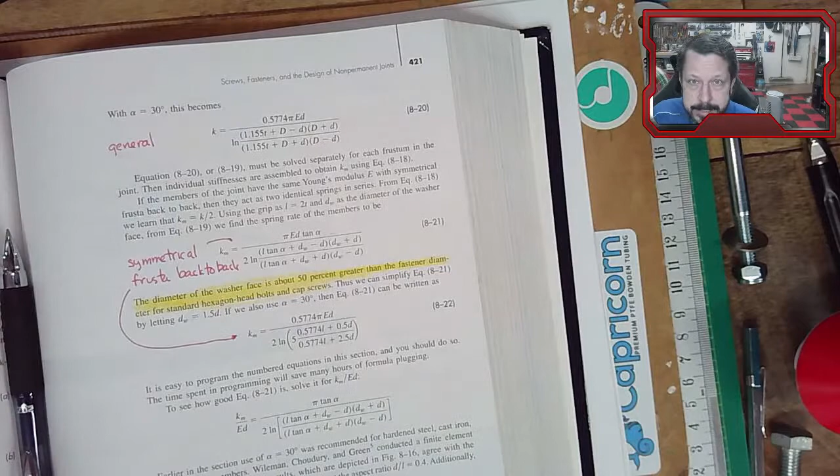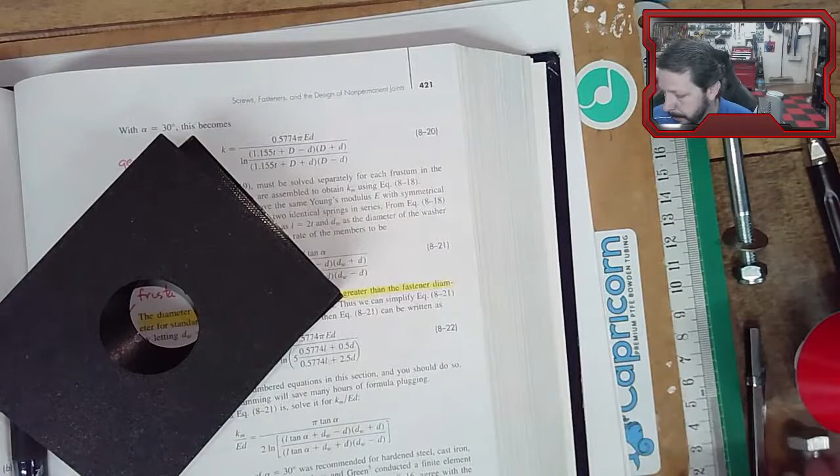Basically it's based on the material's modulus of elasticity, which in this case you do have to be careful about, because these two pieces may not be the same material. In a bolt, you're pretty certain the bolt is all the same material, but these two may not be. That one might be aluminum, this might be cast iron, and then you might have a steel washer on one side of it, so your grip is made up of three different materials. So each material is going to have its own version of this equation.

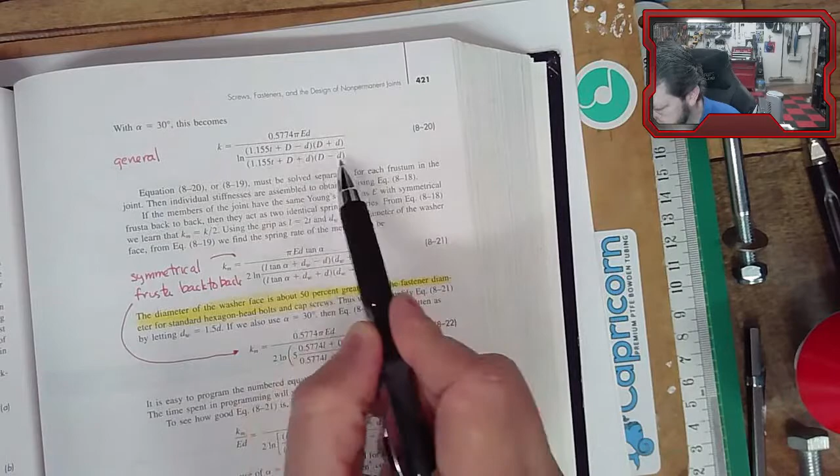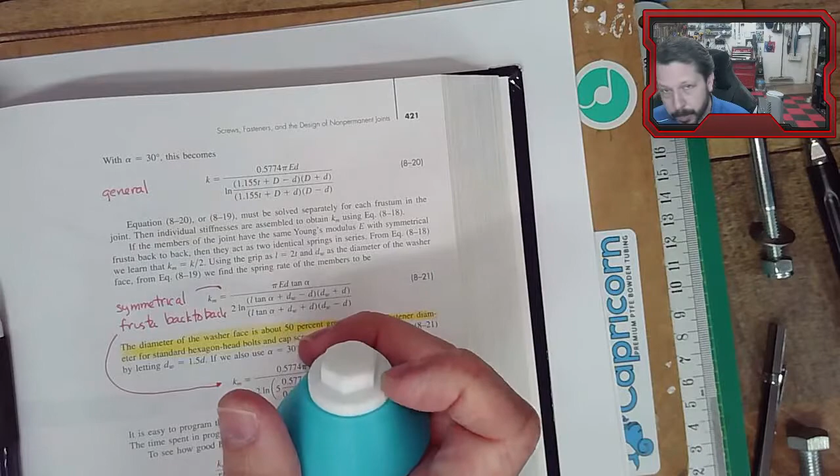This is the general equation that you can apply to one piece of a frustum that has the same material. And you've got all these D's and T's shown in this combination of diagrams over here. So D, the uppercase D, is typically the washer face diameter. So it might be that you don't have a washer and it's just the washer face for the head of the bolt. Maybe you do have a washer and you don't know its diameter, or it's really, really wide and kind of oversized. In those cases, you use 1.5 times the bolt diameter—not the head diameter, but the bolt diameter. I think your book even mentions that somewhere here: the washer diameter is 1.5 times diameter.

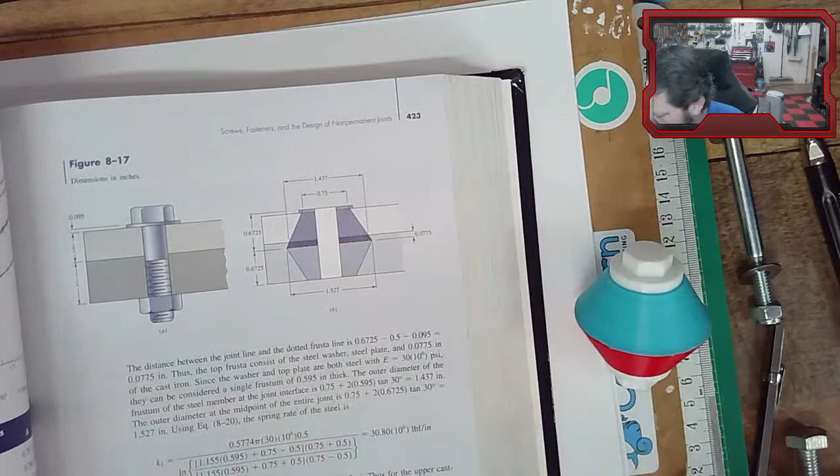Sometimes you might be working with a portion of one of the frusta, like this piece here. And in that case, you pick the diameter, uppercase D, as the smaller of those two. In that case, it would be this 1.437 number from here to here—I'm talking about this little sliver. So that's D. Lowercase d is basically the bolt diameter. There is some amount of clearance between the bolt diameter and the hole the bolt goes through, but typically you just use the bolt diameter.

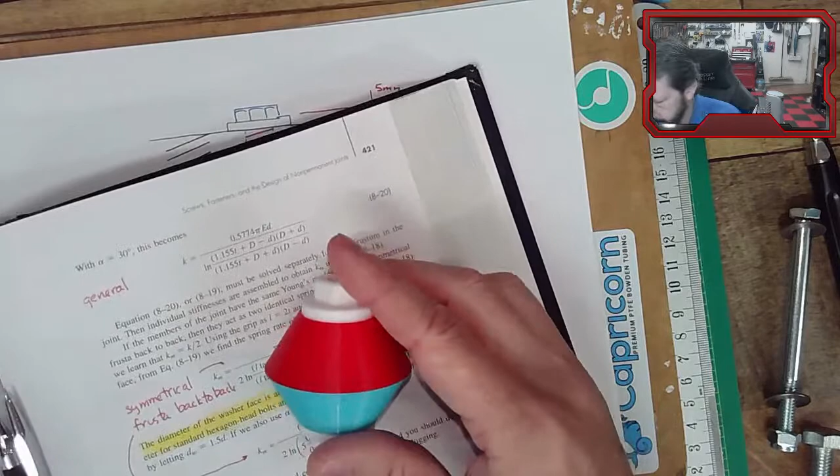T is the thickness, so how thick is it this way? And again, you might have a case like this one where the thickness for this darker piece is this really thin 0.0775 inches. All right, so that's this equation.

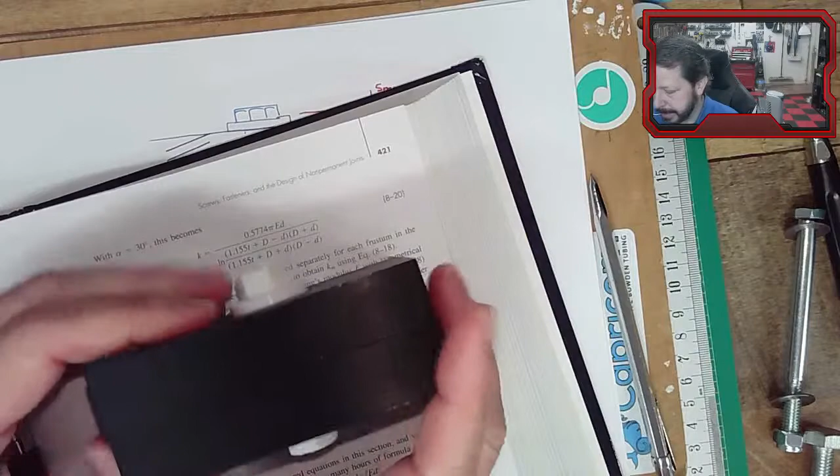This one can be used if we have a situation where the plates you're clamping and the combination of washers are symmetric about a center line. In that case, you end up with two frusta that are exactly the same, and you can calculate them with this equation. It basically combines a couple of things—you can now see the washer is included in there, and there's your angle, alpha equals 30 degrees, for what we're using.

They've combined a couple of things together here, and this one goes a little further. This is an iteration of this equation where they plug in alpha as 30 degrees, so you don't see the alphas anymore - the tangent of alpha has all been evaluated. They also said that the washer diameter is just 1.5 times the diameter of the bolt, because that's pretty common. If all of that's true, you get a simpler equation.

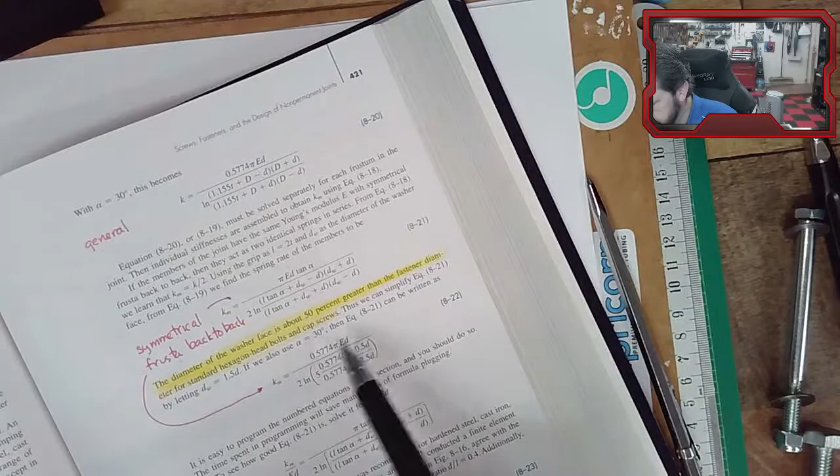This is just comparing that this is a good way to solve it. Even simpler is down here.

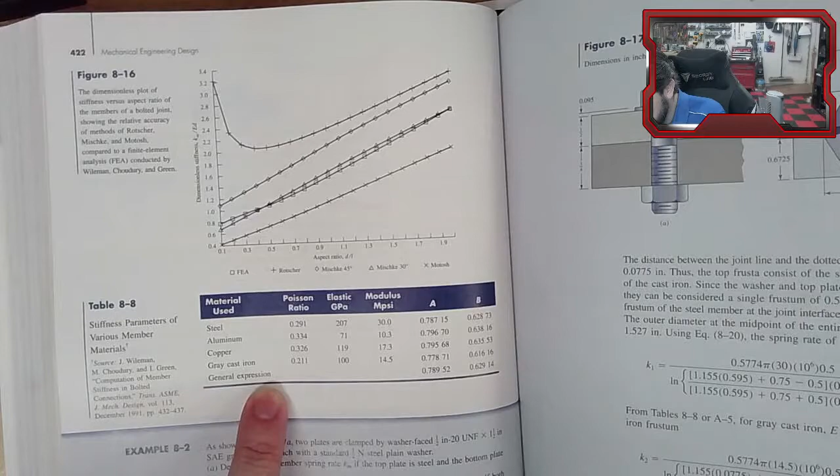This one's a special case where everything in the grip is the same material, so it's all steel basically, because your washers are going to be steel. On the next page they did some finite element analysis simulations and developed these charts - actually they can be different materials: steel, aluminum, copper, gray cast iron, and a general expression for the shape of these curves. They've got these A and B terms, and you can put A and B into this simple equation to get your member stiffness this way. So this one only works in certain conditions where all the material is the same. I'll have to check more closely.

It says the entire joint must be made up of the same material. So to me, that also means that the washers, if used, are the same material, but you're not going to have cast iron washers pretty much anymore. Copper washers are kind of - sometimes you might have this scenario because there is the risk when you have dissimilar metals, like steel on aluminum, of galvanic corrosion when two different metals touch one another. So it isn't that crazy that you'd have all the same metal touching each other in a bolted joint like this.

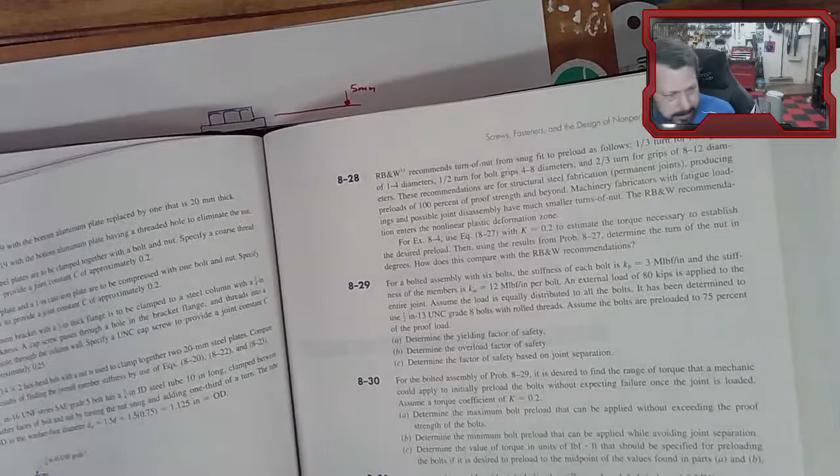We are really short on time, so I think I'll have to do the calculations for the actual member stiffness in a separate little video, like I did with the other thing. That's kind of nice anyway - it keeps it separate from just the discussion of things. So I'll do that and post it later, hopefully later today, and get this MathCAD sorted out on why it's not giving me the stiffness in the units I want.

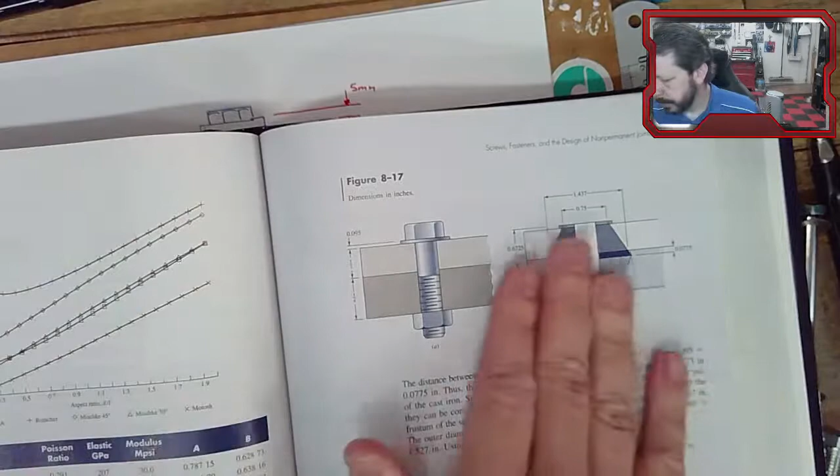I'll analyze this one first because it's one of the more straightforward ones. But then it would probably be good to look at one like this where you have to deal with a different little piece, because this is steel. This one, I don't know what material they have on the top there - maybe that is steel also, I'd have to read.

With different materials, the mirror line of the Frustum is not at the interface between the two different clamp materials, so you've got this little thin layer. This is more involved, and maybe I'll work through one like this also, because it would be useful to see how all the different dimensions work out. I don't have a physical model of one of those like I do for this one though.

All right, I'll see you actually on Monday. We're going to take all of this knowledge we've got with bolt and member and joint stiffness - we still have to talk about combining the member stiffness and joint stiffness. You can tell what we're going to do: we have bolt stiffness and member stiffness, and they're in parallel, so we're just going to combine them in parallel as if they were springs in parallel, which is simple to do. On Monday we're going to use all that and actually do some stress analysis on the clamped members, and then we'll move into fatigue settings - static first, then fatigue on those clamp joints, bolt threaded fasteners.